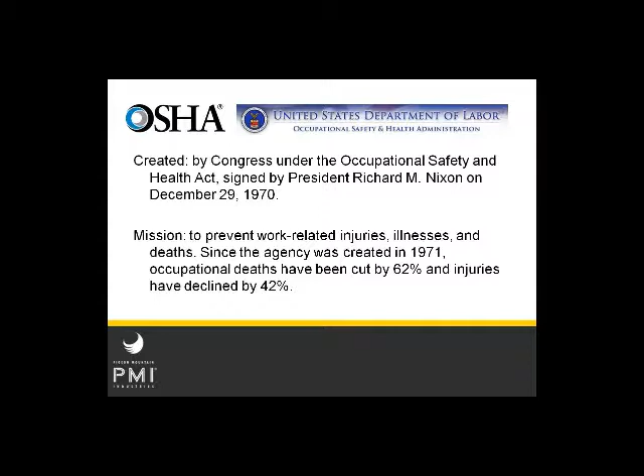OSHA has tried to address the matter. OSHA, as you well know, is the Occupational Safety and Health Administration. It was created by Congress in 1970 under the Occupational Safety and Health Act, and the goal of OSHA was to prevent work-related injuries, illnesses, and deaths. And since the agency was created, that's actually happened. OSHA has actually helped to reduce workplace deaths and injuries in a big sort of way. When we look at the fall statistics, though, we find that that doesn't necessarily hold true.

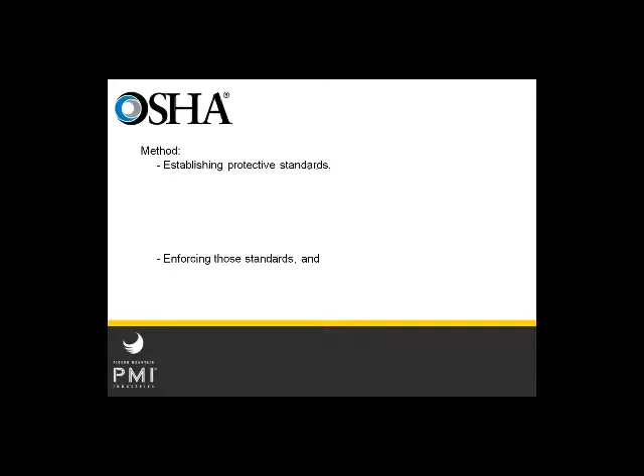The way that OSHA has done that is by establishing protective standards. They enforce those standards. And then they also reach out to employers and employees to actually assist them in being compliant. So it's not just a stick philosophy. There's also a carrot involved. OSHA and the state partners have about 2,100 inspectors, and that's how they enforce the standards. And in addition to those inspectors, they have discrimination investigators, doctors, engineers, standards writers, and all sorts of other technical people all throughout the country to help support the whole occupational safety and health process.

The big question that I get a lot is, does OSHA really apply to me? And in most cases, I have to be honest with you, the answer is yes. OSHA has jurisdiction over pretty much all workplace safety in the United States, with the exception of federal government employees, city, state, and county employees, certain special employee groups that are elsewhere covered, such as flight crews, truck drivers, mine safety, ships, family members working on a family farm or a sole proprietor pretty much of any kind, and volunteers. So unless you fall into one of those categories, you are subject to OSHA. If you have employees, your employees are certainly subject to OSHA.

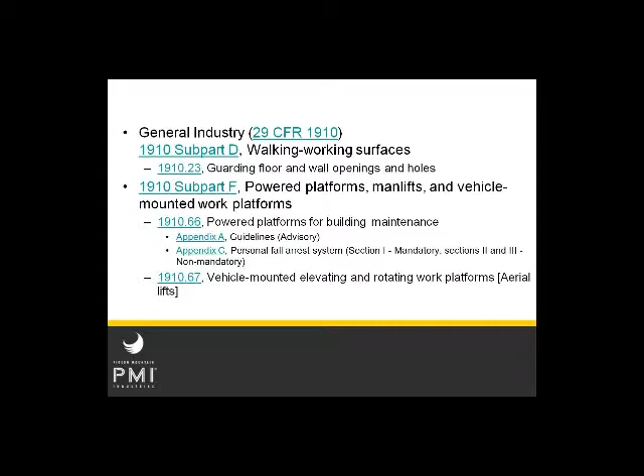There are so many requirements spread throughout the OSHA regulation that figuring out which things specifically apply to you can be very difficult. General industry is contained in 29 CFR 1910, which has a bunch of subparts that actually have fall protection requirements. There's subpart D, subpart F, things specific to powered platforms for building maintenance, vehicle-mounted systems, personal protective equipment requirements, and a lot of special industries.

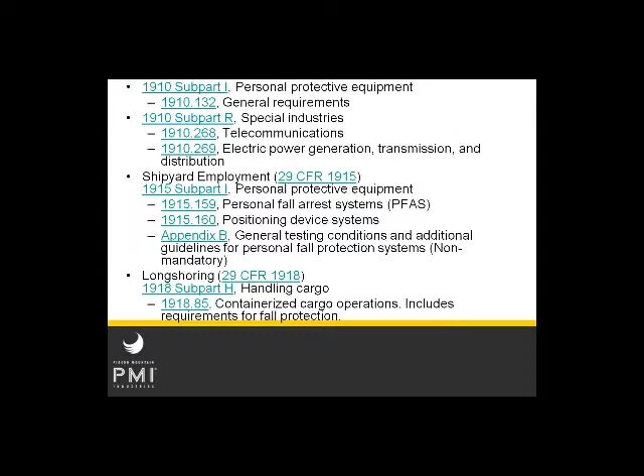Shipyard has its own requirements, as does longshoring. If you're in construction, which isn't really addressed in this talk, there's a whole other set of standards that specifically apply to you, and the standards do differ. So if you're doing fall protection under one group of standards, they do differ from the other.

Now OSHA recognizes that this is a problem, and they're working on it and trying to resolve it. But until it does, it can be kind of confusing.

The frustrating part, though, is despite all of these standards and regulations, and despite all of the billions of dollars spent over the last umpteen years to protect people against falls, falls still continue to dominate the injury and death statistics in the workplace.

The main reasons, if you go through the OSHA fall incident reports—reports from things that have happened, fatal facts, if you will—have to do with infeasibility of fall protection for the type of work being done, improper use of equipment, or a failure to rescue. Those three things are pretty much the reasons given in most situations when injury or death occurs due to a fall.

If you look at the actual number of fatal falls over the years, the average per year between 1992 and 2004 is about 300 deaths per year. That's the total number of fatal falls, and it includes even slips, trips, and falls on the same level. Separating out the fatal falls from height, we see that about 71%, or an average of 213, were fatal falls from height over those years.

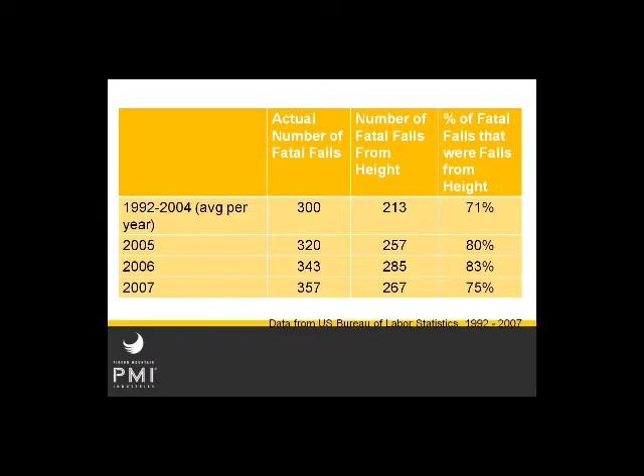There was a study done in 2003 that is pretty enlightening on this subject. These guys investigated almost 3,000 fall accidents that occurred between 1990 and 2001. You might think, oh, that's old data, and in a way it sort of is, but it's difficult to get away from old data when talking about falls because it takes a while to compile the statistics.

Anyway, about 3,000 falls were studied in this project, and it was found that about 30% of them were attributable to inadequate, inappropriate, or a complete lack of PPE, personal protective equipment. The interesting thing is that in 1996, the OSHA PPE regulations were revised, right in the middle of this study's time period, and between one and the other there was no significant improvement in the fall statistics.

We also have incidents of suspension trauma or suspension intolerance. This is a highly debatable topic that generates a lot of lively discussion in various environments. But we have seen incidents of asphyxiation while a person has been hanging in a harness at height due to failure to rescue. So is the problem suspension intolerance, or is the problem failure to rescue? Well, we can talk about that all day long, but that is one of the things that occurs with people at height.

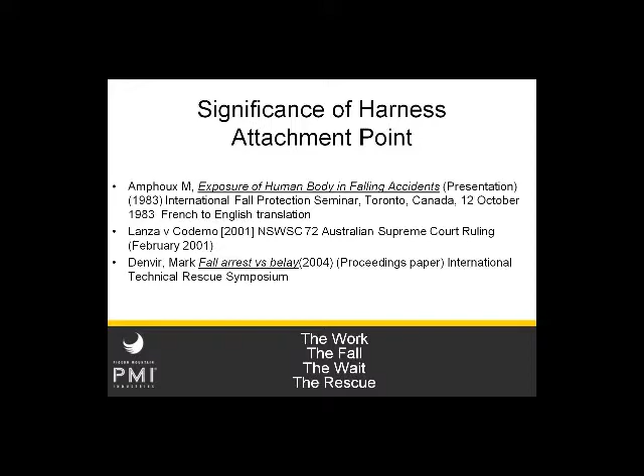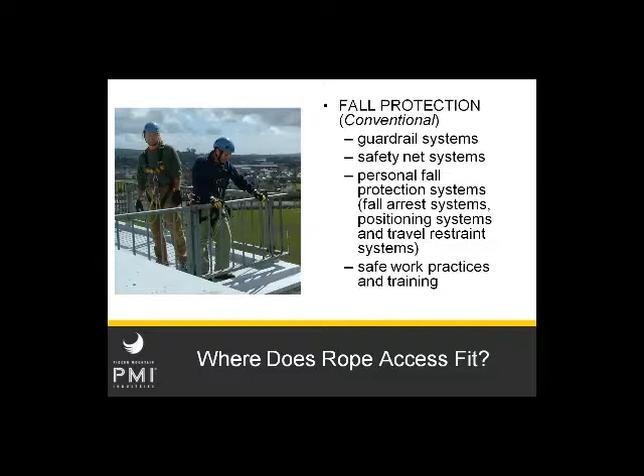So where does rope access fit with all of this? Fall protection is a big all-encompassing topic. When we talk about fall protection, we're not just talking about fall arrest systems - we're talking about everything from guardrails to safety nets to fall arrest, positioning, restraint. What we're going to talk about today is primarily personal fall protection systems comprised of fall arrest, position, and restraint, including rope access.

When we talk about rope access, we place it at about the middle of the hierarchy of control. If you've never seen this hierarchy of control before, it's a really good way to assess your decision-making process for how to protect someone at height. The best route is obviously eliminating the hazard altogether. If you can possibly eliminate the fall potential, substitute the type of work being done, that's obviously your best protection.

Passive protection is things like guardrails. If you have a guardrail, then theoretically people aren't going to fall off the structure unless they climb over it. The next best thing would be restraint - putting a person on a leash so they can't possibly reach the edge or the fall hazard. Then fall arrest is near the bottom, and administrative controls is really one of the least desirable methods of fall protection.

Administrative controls consist of things like a yellow line painted on the ground telling people don't go past this line, or a safety lookout posted on the structure telling people to be safe. That's really the least desirable method of protection.

When we talk about rope access, we tend to talk about it as being somewhere in or near the restraint category. The restraint category essentially prevents the fall from occurring in the first place, and rope access, because it is a double rope system, prevents the person from ever really entering what OSHA considers to be a fall hazard - a fall being anything more than about 4 feet.

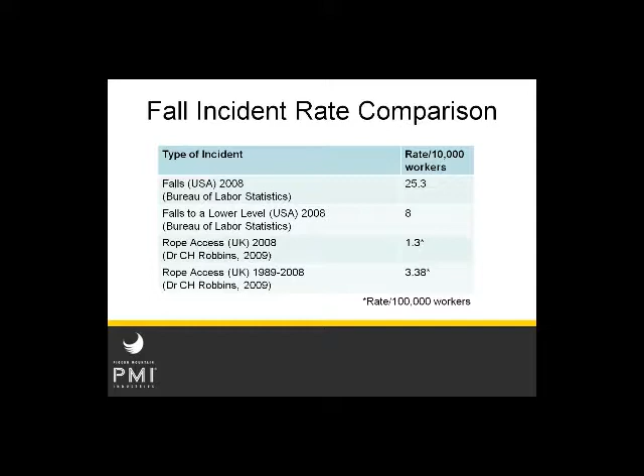In the same year, in the UK, there were 1.3 falls per not 10,000 workers, but 100,000 workers. I highlighted that just because I wanted to point out the difference in the way that we do our statistics versus the way that they do theirs. They put their rate per 100,000 workers, and we put our rate per 10,000 workers. So by the time you do the transfer and move your decimal, in the UK, using rope access techniques, you're seeing a much lower probability of falls or fall incidents.

Well, why is that? We find that rope access, because it is so versatile, makes fall protection more feasible - it makes protection of the worker more feasible. There are places where typical fall arrest or fall protection methods that are more commonly addressed specifically by OSHA just aren't really possible. Whereas with rope access, the versatility allows you to put it in various environments.

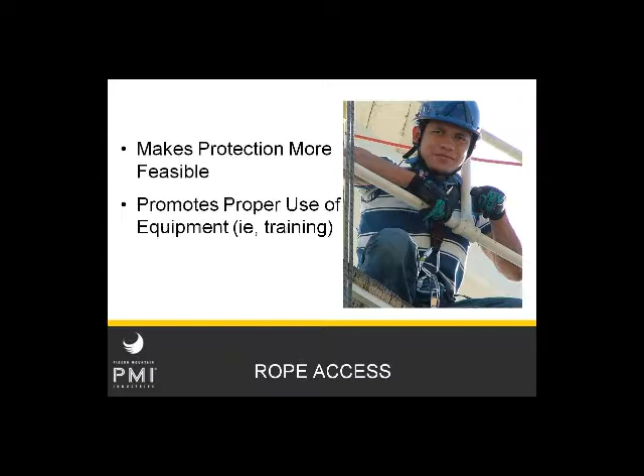We also find that the amount of training required for rope access workers really helps ensure proper use of equipment, not just use but also inspection and care. And finally, rope access really facilitates rescue because everyone trained in rope access is also trained in self-rescue and partner rescue. For those reasons, rope access really helps facilitate safety in places that might otherwise be unprotectable.

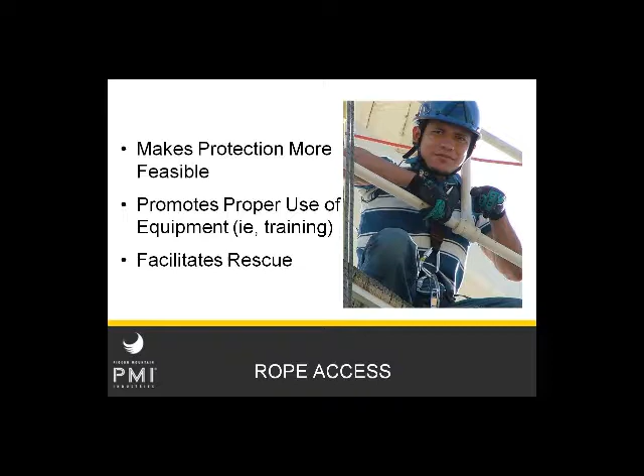There aren't really any standards specifically for rope access, at least not yet. There are a lot of national consensus standards that apply to fall protection, like ANSI A1264, A10.32, IWCA 1-14, and Z359. Those consensus standards actually have sections that describe rope access methodologies.

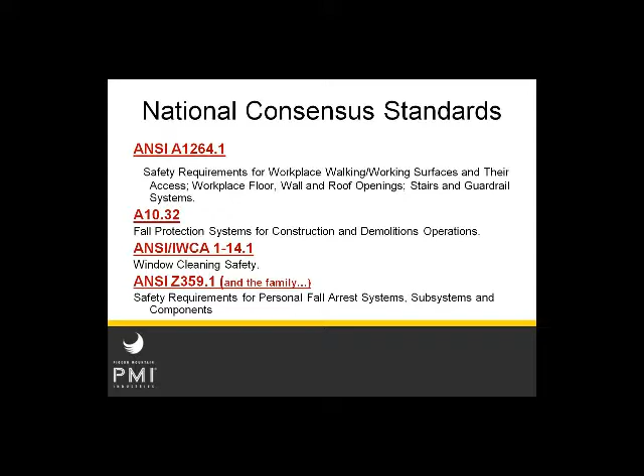They describe fall protection techniques, with the exception of Z359. Z359 actually does address rope access specifically and will continue to do so in a bigger way.

The point I want to make, though, is that ANSI standards are not law. If an ANSI standard exists for something, you are not bound to follow it the same way you are with OSHA. You must comply with OSHA. OSHA is a federal requirement, but an ANSI standard is really just a guideline for how to achieve OSHA regulation. The ANSI standards themselves are not law.

That said, they do provide guidance related to worker protection, and in fact, some ANSI standards are named in the OSHA field manual, which is basically what their field inspectors carry around to assess hazards in a workplace.

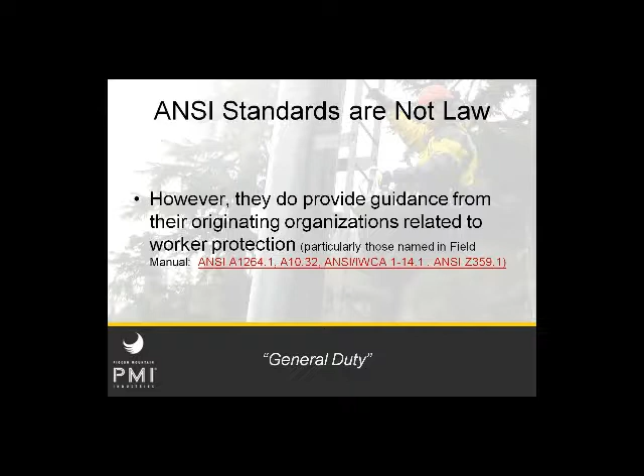ANSI standards can become mandatory through incorporation by reference. For example, certain OSHA regulations, such as CFR 1910.135, say that protective helmets purchased after July 5th, 1994 have to comply with Z89.1. That means since OSHA has specifically cited this standard, you really have to use a helmet that complies with it.

In most cases, when complying with an ANSI standard to meet an OSHA requirement, OSHA accepts the more current version of that standard. For example, Z89 has been updated at least twice since the 1986 reference, because ANSI requirements are a lot easier to revisit and update than OSHA regulation. So it's been updated since then, and OSHA will actually preferentially defer to the newer standard.

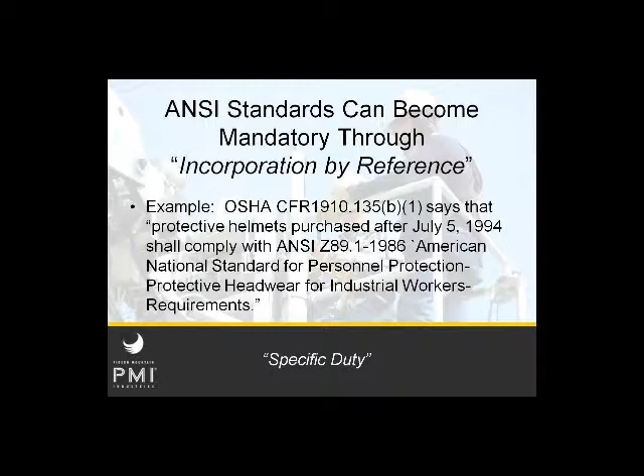In addition, you can be cited for not following voluntary standards. For example, the ANSI Z359 standard is not specifically cited by OSHA as being required. OSHA does, however, say it's a good way to achieve their requirements, but it's not actually cited in the regulation as a requirement.

The other thing to be aware of is that if you don't follow an existing standard, you can be subject to civil or criminal liability, even if OSHA does not cite you. For example, if you injure an employee and OSHA doesn't find you negligent due to an existing standard, that person or their family can still sue you, and they'll probably cite industry standards as being the recognized industry best practice, which is a really big deal.

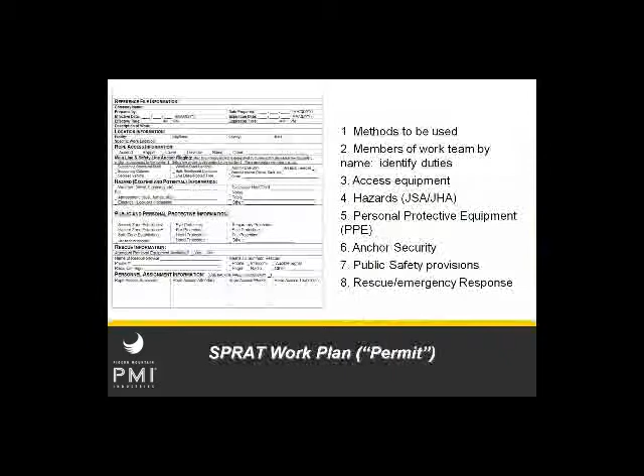So what are some common fall protection methods? Well, we talked about avoidance. Avoidance is avoiding the fall altogether. We talked about restraint. Restraint is putting a leash on a person to keep them from approaching the edge or the fall hazard in the first place. Positioning is hanging or being suspended in such a way that you're not necessarily using your feet for your full suspension or for your full force of your body, but you're protected against the fall. And fall arrest, again, is your least preferred type of protection because it does allow the fall to occur. So those are common fall protection or personal protective methods.

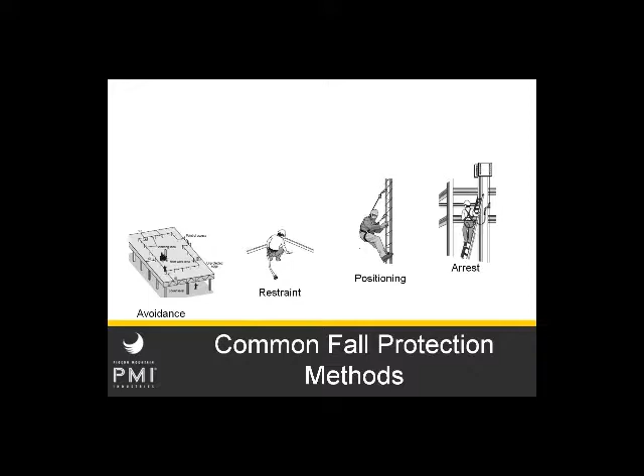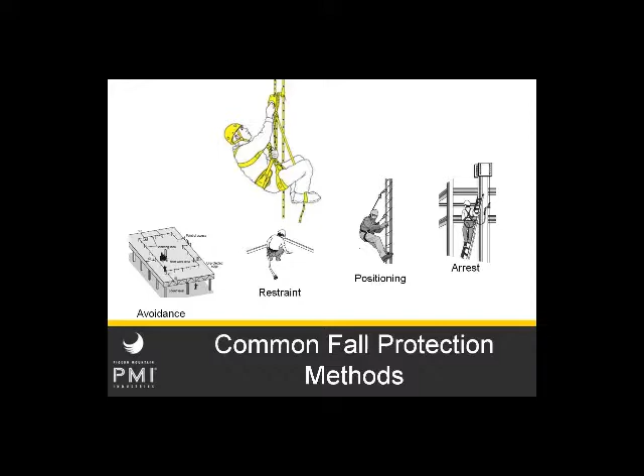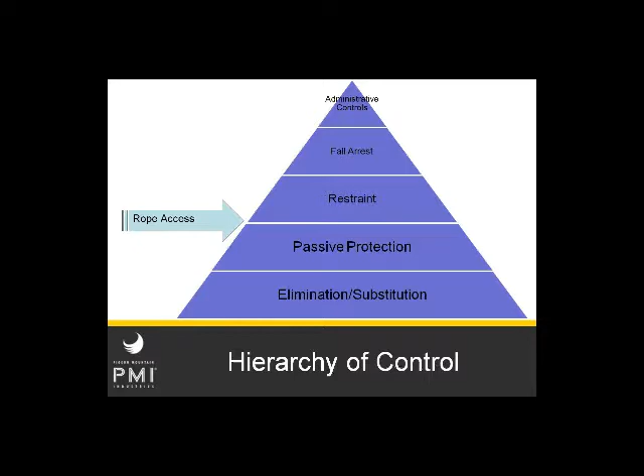Rope access, again, falls somewhere between restraint and positioning. So we consider rope access to be ideally done in such a way that it cannot permit the person to fall. And that's why when we're doing rope access techniques, we always say you need to limit your fall to 2 feet or less, and that keeps us within the realm of positioning. Again, that puts us in about the middle of the hierarchy of control. The hierarchy of control is a fairly commonly recognized tool for use by fall protection and safety managers.

Rope access accommodates increased safety through training, pre-planning, reducing the amount of potential fall, using sternal harness attachments, the versatility of the system, and the redundant safety. So rope access is a good way to stay compliant with your fall protection requirements within your local jurisdiction, as long as you're performing those rope access techniques in accordance with your local jurisdiction.

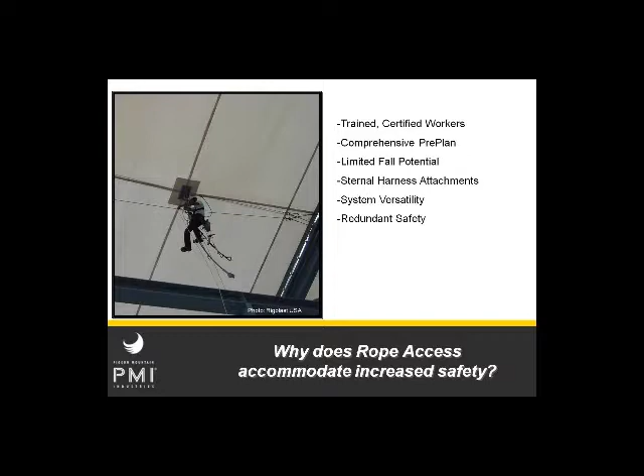Rope access is commonly used by a wide variety of workers, everything from bridge inspectors to construction workers to theater and adventure park and of course wind turbine personnel. So rope access is fairly widely used across the board in both general industry and construction.

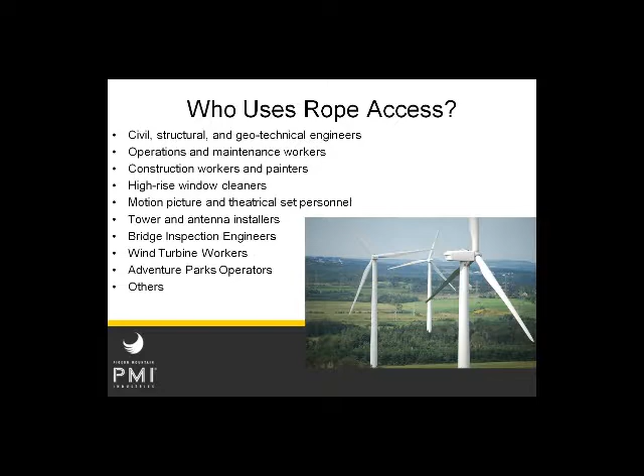Guidelines for doing rope access work can be found in the Safe Practices for Rope Access Work, as well as certification requirements for rope access work. Both of those can be found at the SPRAT website, www.sprat.org. And the SPRAT documents will provide excellent guidance for how to do rope access work, but you need to also understand the requirements of your local jurisdiction as they pertain to whatever regulations that you're going to fall under, no pun intended, and you need to work within those requirements as well as within Safe Practices for Rope Access.

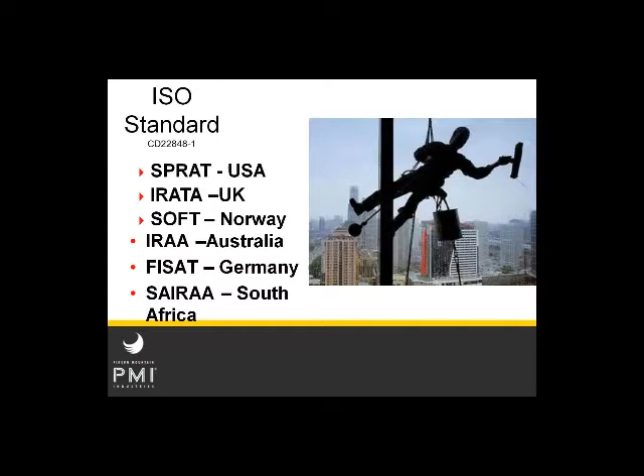There are other existing standards out there for rope access. There's actually an ISO standard. It's 22848. And that is a pretty broad-based rope access standard written by multiple organizations throughout the world. SPRAT was involved in writing that, as was IRATA, as well as the Norwegian, Australian, German, and South African rope access associations were all involved in that process. So rope access isn't just in the United States, and the techniques that we use in the United States are fairly similar to what they use throughout the rest of the world.

So let's talk about compliance here for a moment. Compliance is the act of adhering to a standard or regulation, and not just adhering to it, but being able to prove that you're adhering to it. Compliance is something that you have to consider in terms of federal requirements, such as OSHA or the equivalent of OSHA if you're in another country, state, industrial compliance, so for example, your general industry versus construction, or your shipyard versus longshoring.

You may have local compliance issues. Your local jurisdiction may actually have more strict requirements than state or federal. And then, of course, your company should have its own requirements that fall within the compliance capabilities of the rest of these areas. Rope access is actually addressed on one state level. It's addressed by the state of California in their code, and we're hoping that federal OSHA will follow suit.

When you're considering compliance and trying to be compliant within your local area, a good way to look at it is to look at it the same way that OSHA inspectors look at it. The way that OSHA inspectors are taught to look at it is in the way that's outlined in their field manual. First of all, they have to identify hazard exposure. Hazard exposure can be any hazard that might exist. It can be an observed exposure, it can be an unobserved exposure, or it can even be a potential exposure.

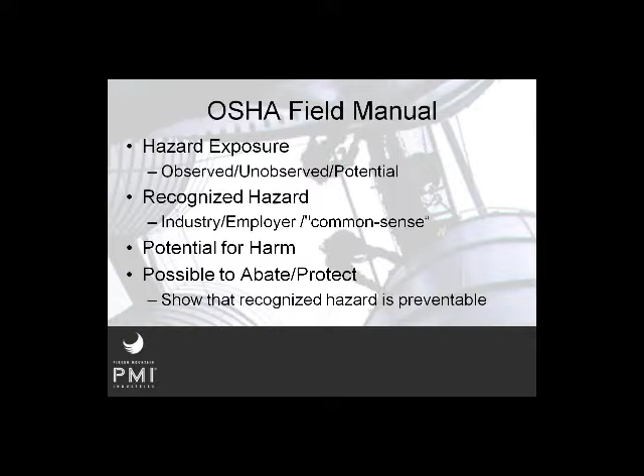The hazard has to have existing potential for harm. So just because there's a hazard, if it can't create harm, if it can't do any damage, then it's really not citable. It's really not a big problem. So your potential for harm has to exist, and your feasibility for abatement has to exist. So it has to be possible to protect against that recognized hazard. So OSHA looks at it with those things in mind, so therefore you probably should as well.

Some ways to do that is to align your work plan with OSHA requirements as well as industry best practices. So know which OSHA regulations apply to you and which industry best practices are most applicable to your type of work. When you're looking at your work plan, think big picture. Don't just think fall protection, but think about chemical hazards that might exist or other things that might be problems or safety hazards within the area.

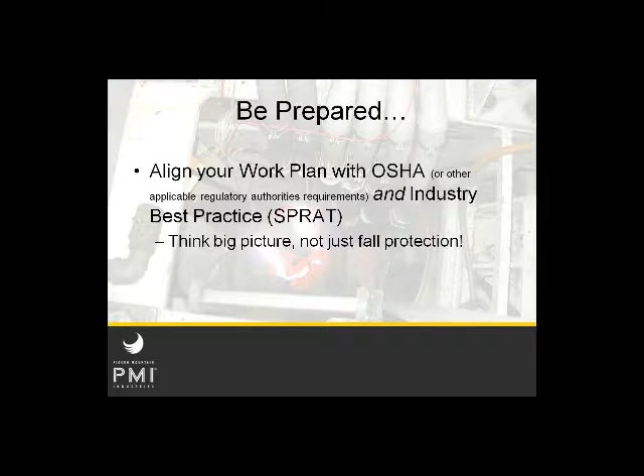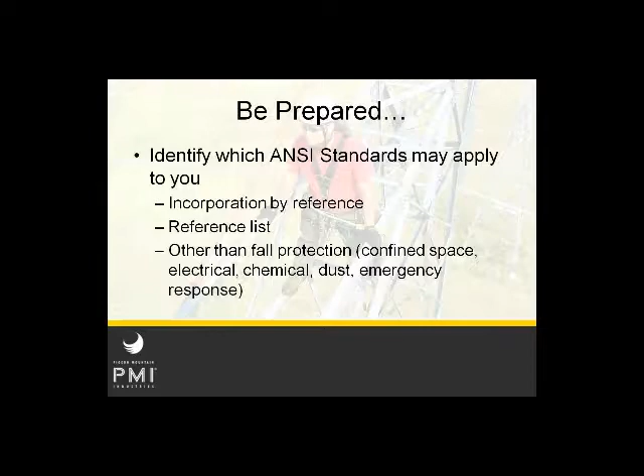Identify which ANSI standards might apply to you. If they apply to you, you should incorporate them by reference, if possible, into your company plan. Use a reference list of some sort. And again, if you decide that you're not going to go with that ANSI standard or even an existing ASTM standard, simply make your argument as to why in your work plan and show why and how what you're doing is as safe or safer than what's written in that document. And again, think about other issues other than fall protection: confined space, emergency response, electrical, dust, etc.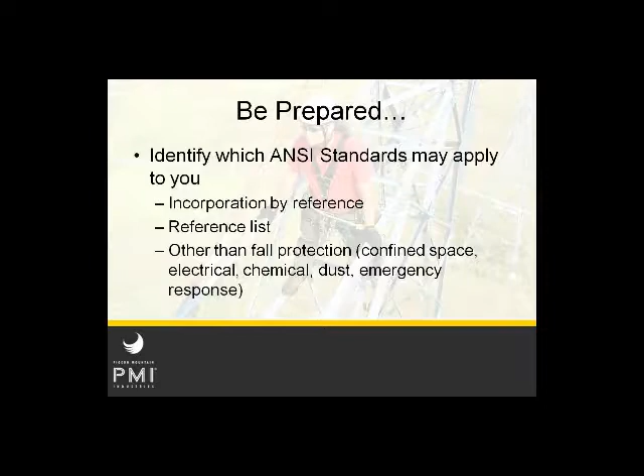In addition, the OSHA general industry side of the house is changing their regulation. There was a big new proposed regulation that came out several months ago, and that is in discussion right now as to how to update that. So be aware of that, be on top of that, and provide input to that as well.

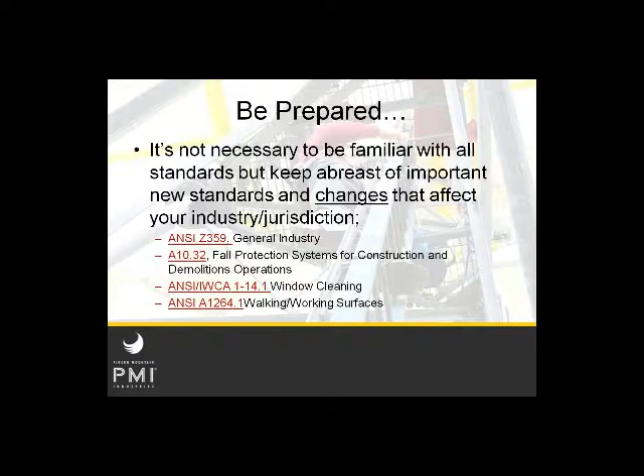Consider outside perspectives. Just because you do something a certain way or have done something a certain way for a very long time doesn't necessarily mean it's the best way. Try not to become myopic. Know what's happening, know what other industries and other people are doing, because that is what might be used as industry best practice if ever you're called into question.

Expand your employees' training and experience, and of course record that training and experience as it occurs. Professional affiliations can really help you stay abreast of what's happening. And if you use all of those things along with a continuous improvement process, you'll be pretty well covered. A good way to handle this is to have sample audits by an outside organization. Sample audits, especially in rope access, are not uncommon, and even in the fall protection industry are not uncommon, and can be a really good way to protect yourself against potential citations from regulatory authorities.

Finally, if you do have an internal or an external audit and somebody recommends that you implement some sort of a standard or some sort of a practice, you should take that recommendation seriously, and you should either accept it or give a darn good reason for rejecting it and write that down. Always keep records. Keep records of your work plans. Keep records of your training, your personnel, their qualifications, the equipment that you use, the inspection and care of the equipment that you use, and again, that continuous improvement process.

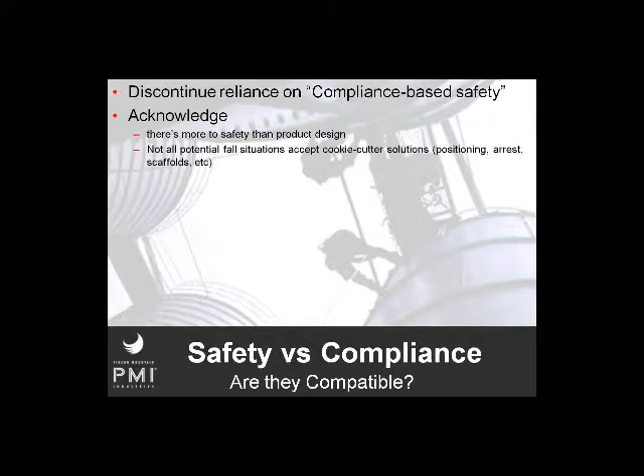We've historically regarded safety as being equivalent to products. If you use an ANSI Z359 marked product, you should be safe. That's hogwash. You need to use the product safely. So there's more to safety than just product design. Not all potential fall situations accept cookie cutter solutions. Again, that's where rope access really finds its niche. If we increase training requirements for everyone who works at height, not just rope access people, it'll keep people from getting themselves into trouble in the first place.

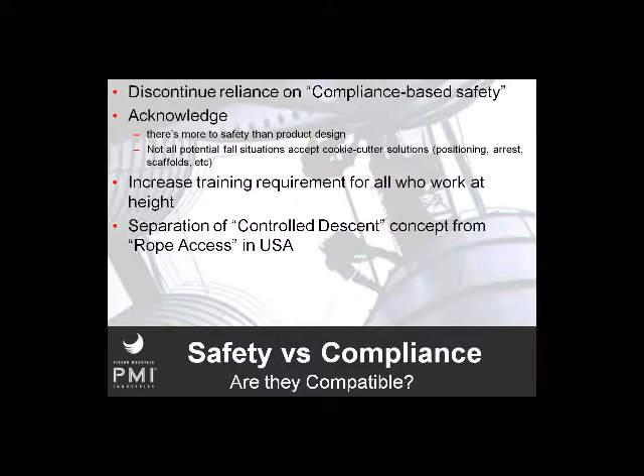And we need to separate controlled descent concepts from rope access in the United States. OSHA tends to look at controlled descent as being very similar to scaffold work. Rope access has absolutely nothing to do with scaffold work. A rope access system is typically fully interchangeable. It's fully capable of using a main line as a safety line and a safety line as a main line, and dashing back and forth between the two as necessary. And so separating the concept of rope access in the United States is going to be a really important factor as we grow the fall protection regulations and requirements.

And then, of course, different training levels for different complexities of work. Not everyone washing windows on the same building for 20 years needs to have the same level of training or the same level of expertise as someone who might be working on the atrium inside and doing metal refinishing work. It's a completely different world, completely different access techniques. We need to make allowances for those people who are doing repetitive type work and who may be using rope access techniques but don't necessarily need to maintain the high level of skills.

And then finally, we need to consider an advanced rope access style harness in fall protection. Typically and historically, fall protection requires that dorsal attachment point, and we're finding that the rope access style harness that has the sternal attachment point is in many cases much safer, not just because you can check your own safety as you're clipping in and out and moving between systems, but also because of the position that it puts you in both during the fall and after.

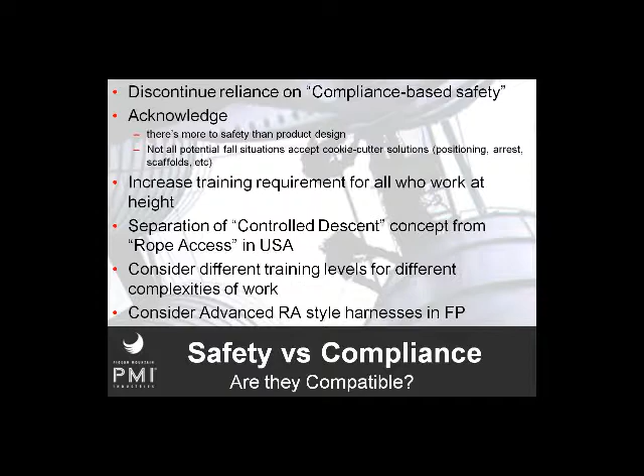Some people complain that there may be a concern of things whipping you in the face as you're caught by your sternal attachment, but the reality is that when you fall and your system tensions up, your head goes backwards, your face and everything kind of move away from your point of attachment. So that's not really what happens in a real fall. So we need to explore all that kind of thing further, and I believe that NIOSH is actually undertaking some work in that regard as well.